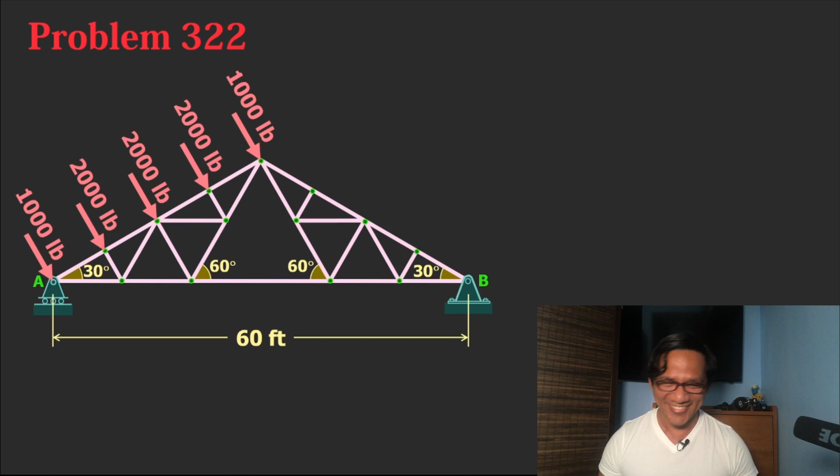We are required to find the reactions at A and at B. We have these 5 concentrated loads applied at the joints of the top chords. These loads, although not indicated in the problem, are perpendicular to this top chord.

Let us start with the resultant of these 5 parallel forces. Notice the symmetry. So for these 5 parallel forces, the resultant will lie on this line. Do you agree? So first, we have this total force, 2,000 at the middle.

Then this 1,000 here and this 1,000 here, the resultant is also here. So for those 2 forces, we have already a total of 4,000. And for these 2 forces, 2,000 and 2,000, the centroid of these 2 is also here. So we have this plus another 4,000. So we have a total of 8,000 applied force for this truss.

How to find the reactions here and here? The next thing to do is to find the components of this force. Take note that this force is inclined 60 degrees from the horizontal. This is 60 degrees here because this is an equilateral triangle.

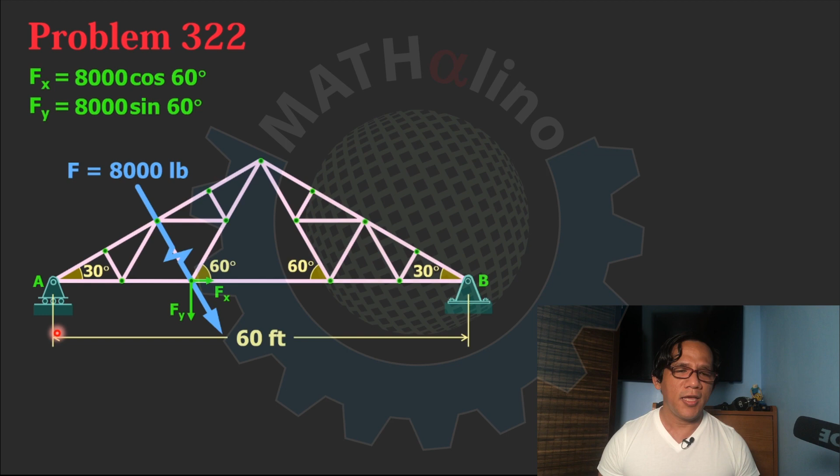Now for the reactions. At point A, we have this roller support, meaning the only reaction it can provide is perpendicular to its plane. Point A cannot prevent rotation, and point A cannot resist forces in the horizontal direction because of this roller, which is parallel to the horizontal direction. So it can only resist a force perpendicular to its plane.

So we have this RA. Then for joint B, or for the support at B, we have this pin support, which means it can prevent translation in any direction. But we are only particular with the horizontal and the vertical directions. But it cannot resist rotation. There is no rotation here because this is a pin support.

So we have this support in the vertical direction, let us call that By, and the reaction in the horizontal direction, let us call that Bx. Now we are going to find Ra, By, and Bx.

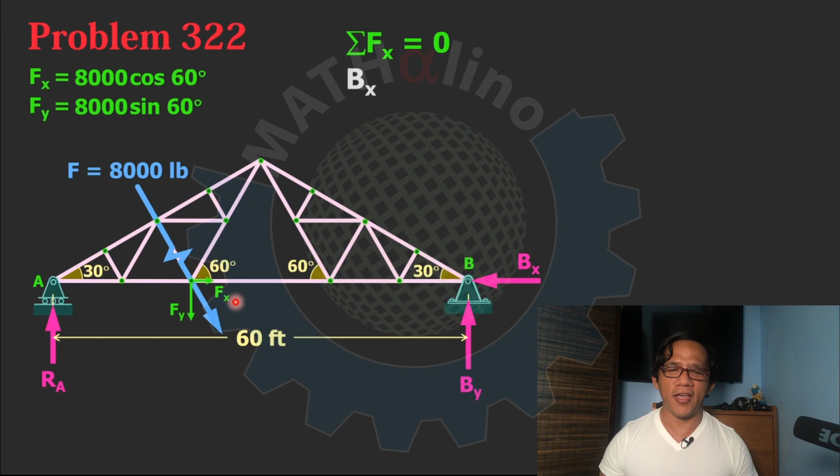How to do that? Of course, for the Bx, it's very simple. Summation of forces in the horizontal direction, or the x direction, equals 0. To the left, that is Bx, is equal to the right. There is only one force to the right, and that is Fx. Fx is 8,000 cosine of 60. So we have this value of Bx that is equal to 4,000 pounds.

How about the By? To solve for the By, we are going to sum up the moments at point A. We know that point A cannot resist moment, so the moment here is 0. Before we proceed with our equation, summation of moment at point A, let us first find the moment arms.

For the force Bx, it will pass through point A, so this Bx cannot produce a rotation at point A. For By, however, it can produce a rotation at point A, a counterclockwise moment or counterclockwise rotation. So the moment arm for that is 60.

Another force that can produce rotation at point A is Fy. What is the moment arm of Fy? That is equal to 20 feet. Do you agree that that is 20 feet? Meaning, between Fy and By is 40 feet. Do you agree that this is 20 feet?

To convince you that this is 20 feet, let us consider this portion of the truss. Let us consider that portion. We are going to rotate this portion of the truss. Let's see that. Now, at the middle of this truss, we have this equilateral triangle. This is 60, this is 60. It will follow that this is also 60. So, this is an equilateral triangle.

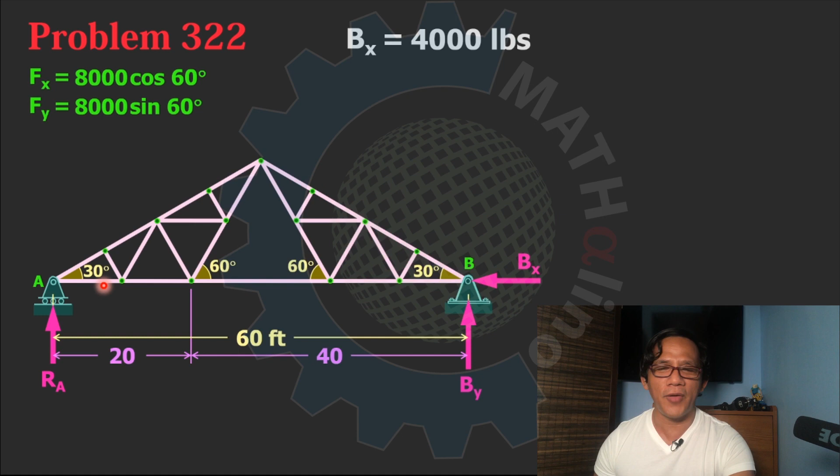There is another, simpler way, and we are going to do that today. If we drop a line here, perpendicular to the bottom chord from the topmost vertex, this is perpendicular. We actually bisected this portion of the bottom chord into two equal lengths. This is a bisector line, so we have this right triangle.

Because this angle here is 60 degrees, we actually bisected also the angle here, so this is 30, this is 30. And because this is 30 degrees here, this angle here totals 60, meaning this is also 30. We already have this another isosceles triangle. The whole structure actually is an isosceles triangle, if you notice that. So we have this small isosceles triangle. That is the design of the truss — very clever.

We have this another isosceles triangle. If this is 30, meaning this is 60, because it's 90 degrees here. And because this is 30 degrees and 90 degrees here, this is also 60, a total of 180. Or you can do 180 minus 60 minus 60, which gives another 60 degrees.

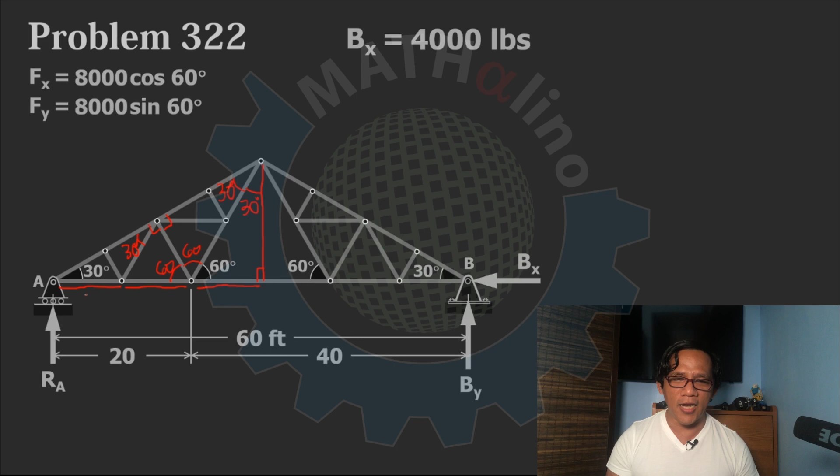Now we have another smaller isosceles triangle here, which means this is 30 degrees. If they are isosceles, this length, which equals this length, is equal to this length. Can you see that? So this length, which equals this length, is also equal to this length, and they are all equal to 10. Did you connect that? This is also equal to 10, because the total here is 30. This is the bisector line at the start.

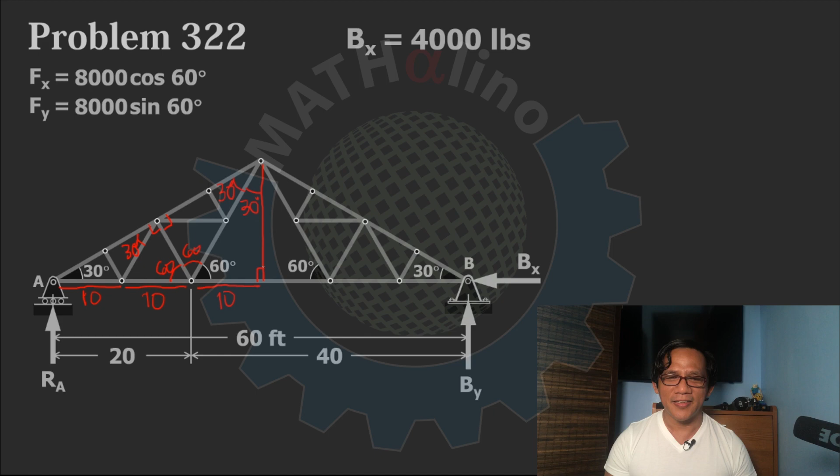So let us go back to our solution. We have this force F, a total of 8,000. Summation of moment at A equals 0. You are now convinced that this is 20 feet.

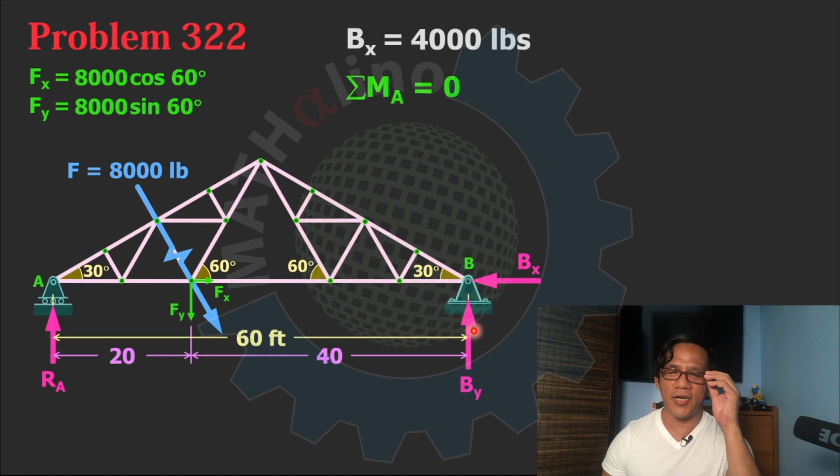So for summation of moment at point A, we have this counterclockwise force, that is 60 times By. Take note that Bx and Fx — I did not mention this earlier — Fx has no rotation about point A. Only Fy and By can produce rotation at point A. I will repeat: Fx cannot produce rotation at point A, also Bx, because their line of action will pass through point A. That is the reason.

So we have this one: counterclockwise rotation about point A, with magnitude 60 times By, is equal to the clockwise rotation about point A.

That is 20 times Fy, and we have the value of Fy, 8,000 times sine of 60. Solving for By, we get the value of By: 2309.40 pounds.

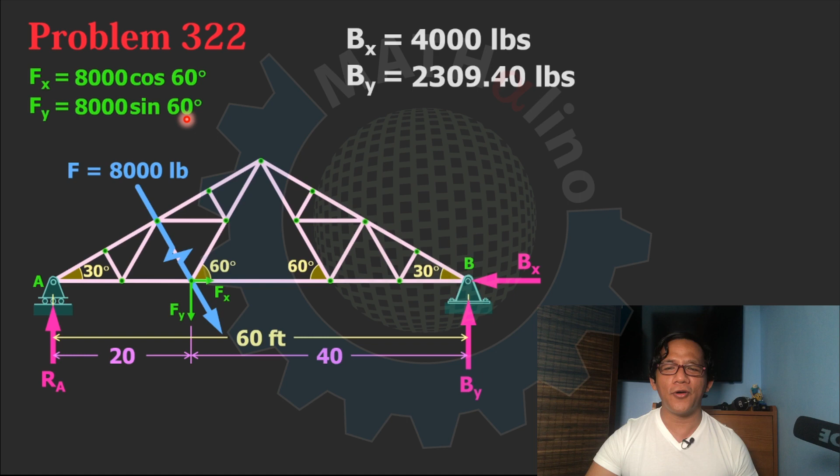Next, solve for Rb, the total reaction at B. To solve that total reaction at B, we are going to use the Pythagorean theorem: the square root of Bx squared plus By squared. Plug in these values into this equation, and we have the value of Rb.

Very easy to solve. Why did we resolve this force into components at this point? The reason is that this Fx has no moment arm about point A and about point B. So that is very convenient, because if you sum up moments at point A, Fx will not get involved into the equation. Also, when you sum up moments at point B, Fx has no moment arm about point B, so that will only involve Fy. That is why we resolve this force into components at this point.

Another option to sum up the moment is by not resolving the forces into components, but instead finding this moment arm. We are going to find this moment arm. What is this length? If we can find this length, then we can go directly, because we are confident that this is 90 degrees here. What is this? Let us call this A. If we can solve for A, we can go directly to solving for By.

How to solve for A? Cosine of 30 degrees is adjacent over hypotenuse. We have this adjacent of 30 degrees is A over the hypotenuse. This line here, because this is the right angle, is 20. Solve for A, and that will be your moment arm for the 8,000 pound force. Calculating, we get 10 square root of 3 feet. You have this moment arm.

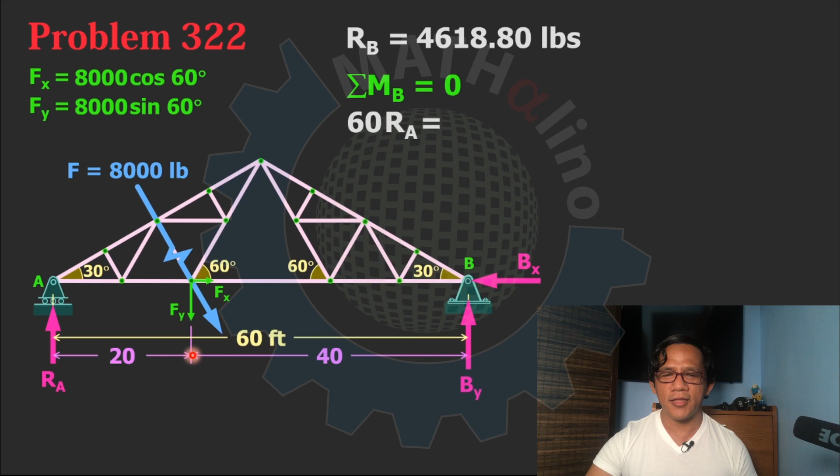So we are going to sum up all moments at B, and that is equal to 0. Clockwise rotation about point B: this RA will produce a clockwise rotation about point B. How about counterclockwise rotation? That is the vertical component of F. Summation of moment at point B: we have this 60, the moment arm of RA, times RA, that is clockwise rotation, equal to counterclockwise rotation, which is Fy times 40 feet. This distance is 40 feet, 40 times Fy, and Fy is 8,000 sine of 60. Solve for RA, and this is our answer.

4618.80 pounds. Well, they are equal, yes they are equal. And don't forget the value of Bx and the value of By.

What is the direction of that Rb? And that is equal to Ra. We are going to talk about that later on, about the reaction at B.

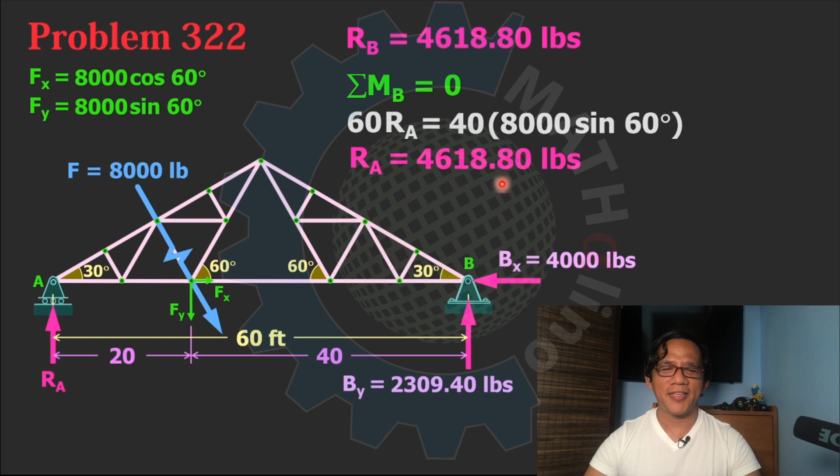Now, let us solve this problem in another way. Let's talk about that. For this Ra, the line of action of this force is this one. Now, we can say that this force F and this Ra will intersect; their lines of action will intersect at this point.

And we have this very important concept in engineering mechanics: if three non-parallel forces are in equilibrium, they are always concurrent. Take note of that. I will repeat: if there are three non-parallel forces that are in equilibrium, they are always concurrent.

Meaning, the line of action of Rb, the total Rb, not just the components, will pass through this point. So to find Rb, we connect this point of intersection to point B. That's it. This is our Rb, the total reaction at B.

Sir, is it really coincident with this top chord? Is that right? Are you sure? Do you have that question, that this line of action is coincident with this top chord?

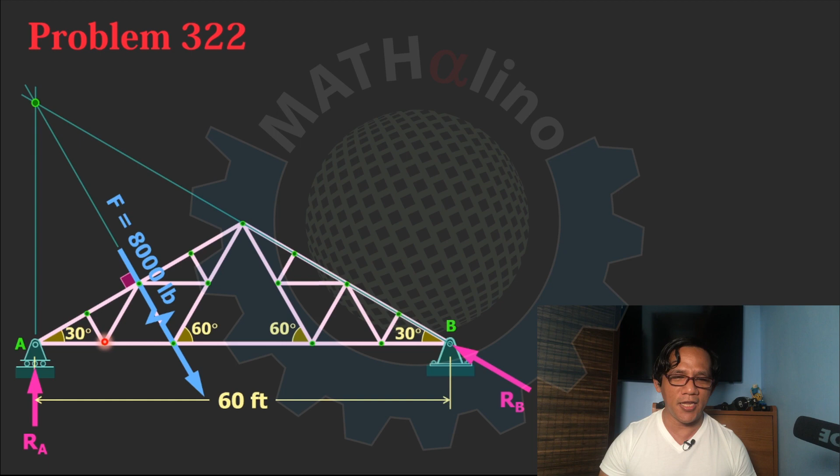Let us investigate. The angle here is actually 90 degrees because that is perpendicular. This F is perpendicular to the top chord. And this angle here, since horizontal and vertical are 90 degrees, and we already have 30 degrees here, what remains is 60 degrees. This triangle is a 30 by 60 triangle. This angle here is 30 degrees.

For this line to pass through B, this triangle must be similar to this triangle. Otherwise, this line from this point cannot pass through point B, if this triangle is not similar to this triangle. Do you agree with that?

I will repeat: this line will only pass through point B if this triangle is similar to this triangle. Meaning, if this is 30 here, of course 90 degrees here, this must be 60 degrees. Of course, the line of action of our force is coincident with the top chord to the right.

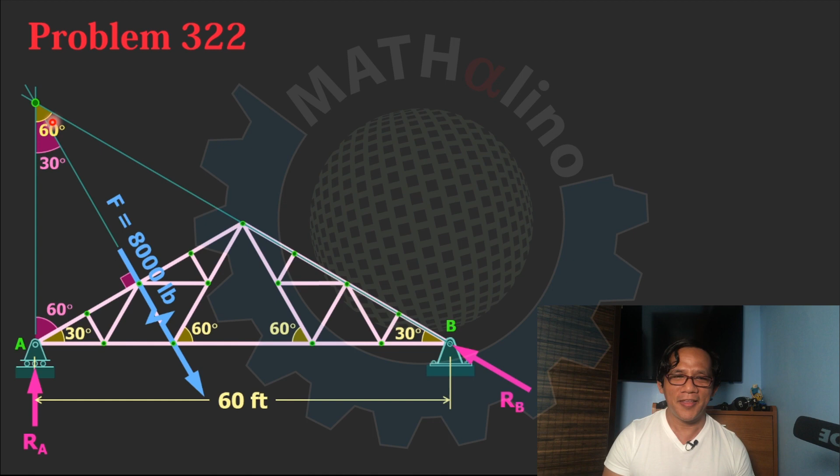Do you agree with that? If you are not convinced, you can do the calculations. You are going to find this height from this triangle, so find this length first. We know that this is 20. Find this length, find this height. Check if that is consistent with this triangle. If not, we are wrong. If that is consistent, we are correct.

You can find the tangent of 30 degrees, opposite over adjacent. If it results in 30, then Rb, the line of action of Rb, will coincide with this top chord. Anyway, by geometry you can see that it is correct.

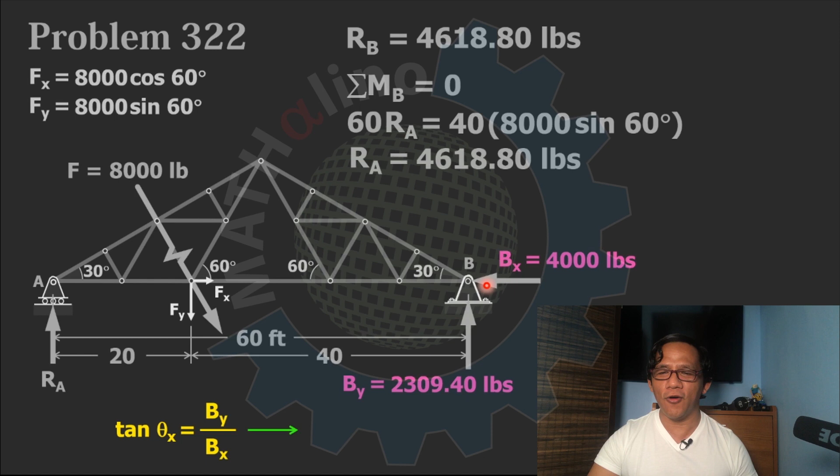If you are not yet convinced that this line of action is on this top chord, you can use the values of Bx and By. Tangent of theta x is equal to By over Bx — that is for the direction of the total force. If you substitute the values of Bx and By into our equation, you can solve for theta x, and that is equal to 30 degrees. Now you are convinced.

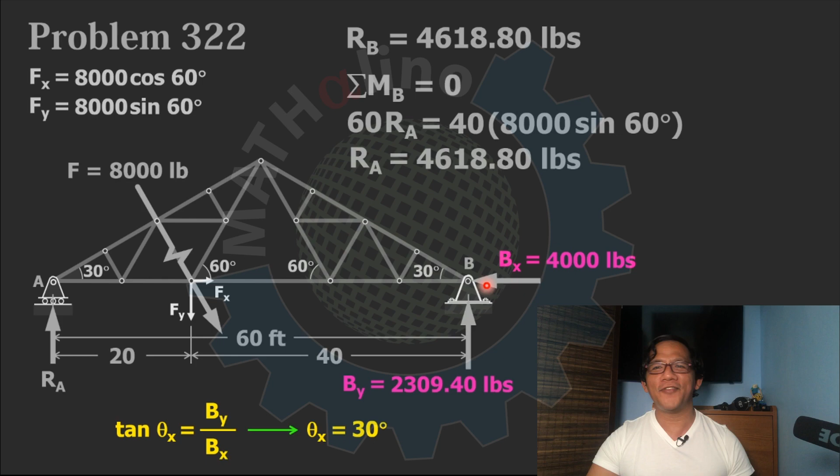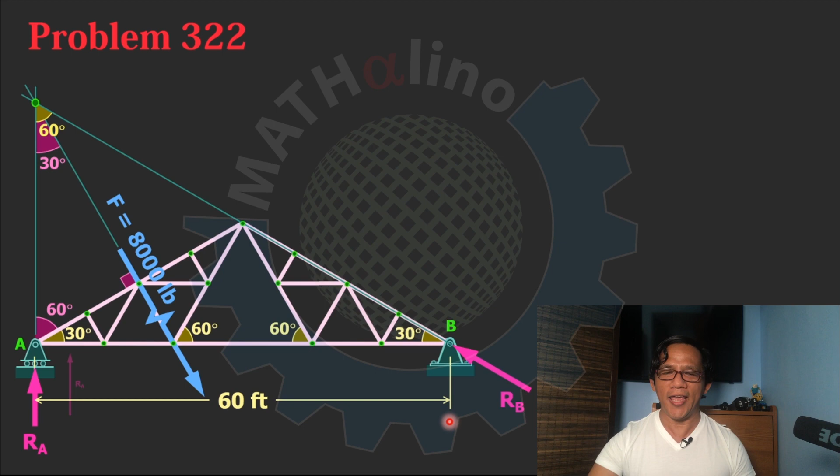Let us go back to our problem. Our task here is to solve for RA and RB by the polygon method. So let us start with RA, then we connect the tail of this RB to the head of the RA. We have this force. Next, we connect the tail of this F to the head of this RB, and let us close the polygon. So we have this line.

What is this angle? This angle is between RA and 8,000 pounds, meaning 30 degrees. What is this angle, between 8,000 pounds and RB? This is the line of action of RB, meaning this is also, of course, 30 degrees.

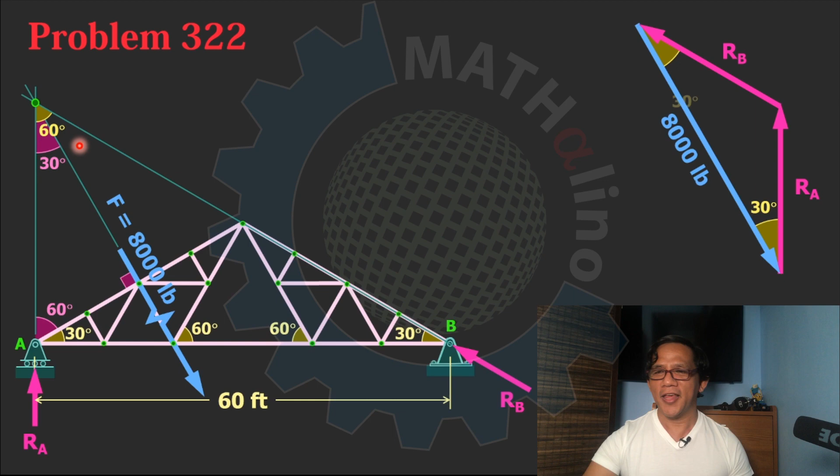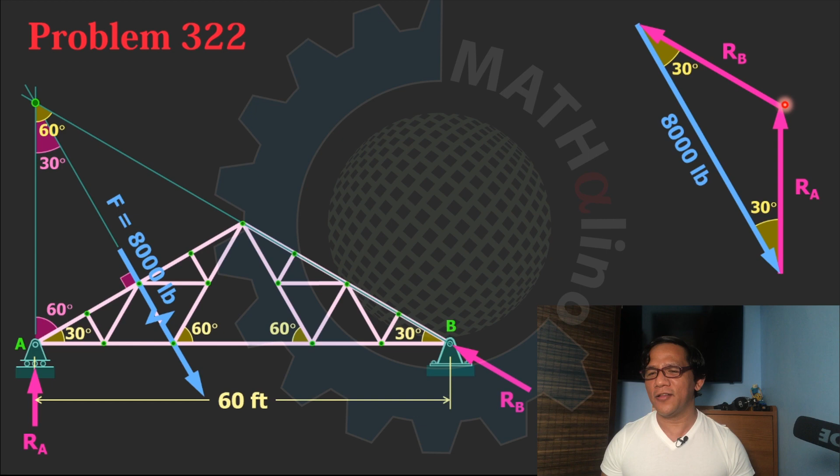And we know they are equal, that's why our drawing here is also an isosceles triangle. If we drop a line from this vertex perpendicular to the 8,000 pounds, we bisect it into two equal segments, so we have 4,000 and 4,000. Above this line and below this line are both 4,000.

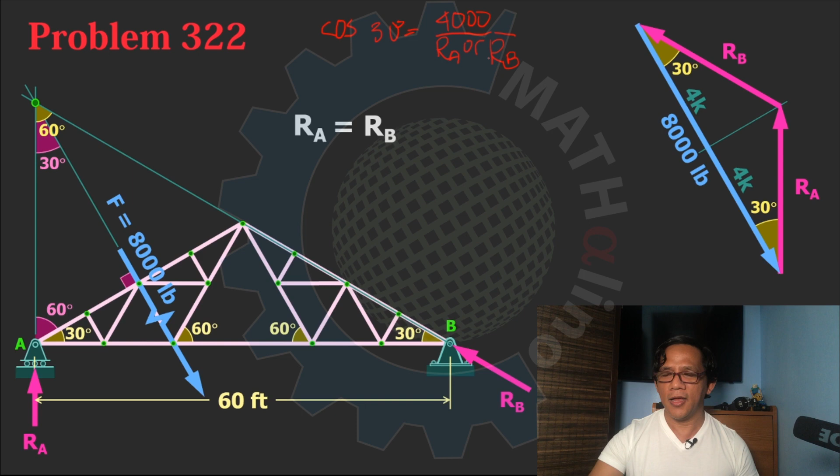What is RA? That is equal to RB. Cosine of 30 degrees is adjacent, 4,000, over RA or RB, depending on which triangle you look at. So we have this RA or RB. That's why RA or RB are both equal to 4,000 divided by cosine of 30. And that is our answer.